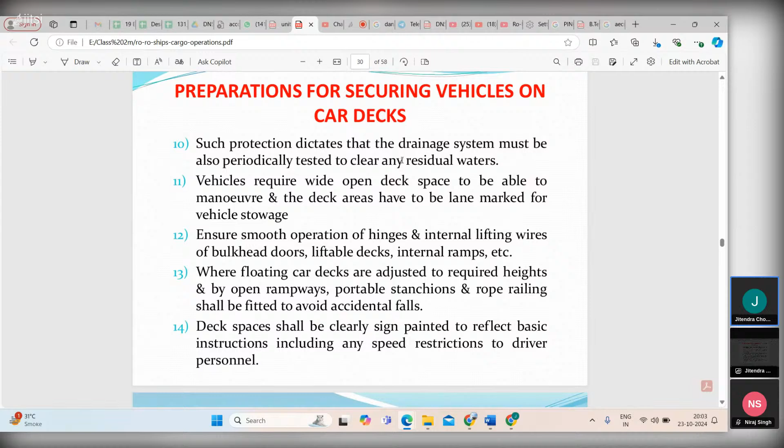We should also have a proper drainage system. If some water enters, due to sweat or whatever reasons, it should be able to drain. The drainage system should be periodically tested, and any residues, say stevedores came and ate something, should be cleaned. Proper cleanliness, hygiene and drainage have to be maintained. There are so many decks, so it's huge, hectic work.

Vehicles require wide open deck space to be able to maneuver. Deck areas have to be lane marked for vehicle stowage, so everything should be marked and enough space should be there for the cars and vehicles to come in and go, with proper lane marking. We will see that in the video now, and we have already seen how big the ramps and the storage space are. Sometimes because of commercial pressure we have very small space and so many cars coming in, going out, loading, discharging, so many ports, very fast operation.

With so many people and coordination, we have to ensure smooth operation of hinges and internal lifting wires of bulkhead doors, liftable decks, internal ramps, etc. Floating car decks are adjusted to required heights, and by open rampways, portable stanchions and rope railings shall be fitted to avoid accidental falls. So there should be railings or stanchions in all the rampways so that you don't fall. This also we'll see.

Deck spaces shall be clearly signed and painted to reflect basic instructions, including any speed restrictions for the driver, like you have on roads and highways. You can have a small look. See, this is so wide. That's why we have such big ramps, a proper opening. Sometimes you have them on both sides, one side for vehicles exiting and one side for vehicles entering.

Vehicles from international waters travel to your shores. Today, that curiosity will be answered. Imagine a ship, not just any ship, but one designed to transport thousands of vehicles across vast oceanic distances. This is the world of Ro-Ro, or roll-on, roll-off ships. These giants of the sea are not just marvels of engineering.

Not just marvels of engineering, but also the lifeblood of international trade. As we explore a Ro-Ro ship, we'll dive deep into the ship's daily life and operations, offering a first-hand glimpse of the sailors' challenges.

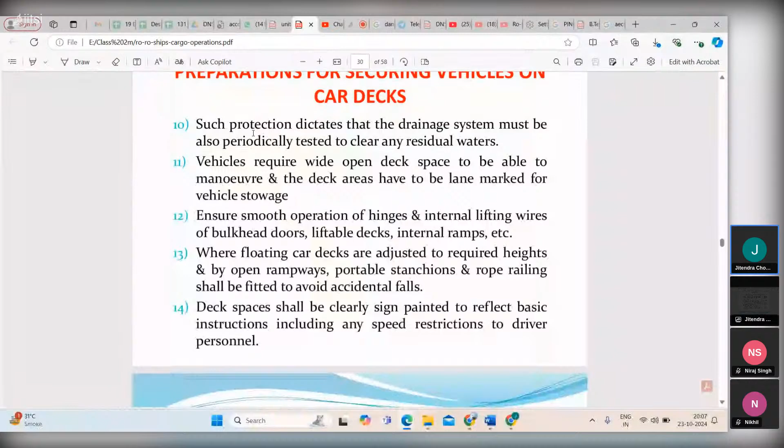Traffic cones shall be laid to indicate the safe driving route. These are the traffic cones which you saw. Then you see the ships. The first thing we saw was the traffic cones.

Maritime transport dates all the way back to 3500 BC. Marvels of engineering, but also the lifeblood of international trade.

As we explore a ro-ro ship, we'll dive deep into these ships' daily life and operations, offering a first-hand glimpse of the sailors' unique challenges, from the intricate dance of loading and unloading vehicles.

Other passages shall be blocked using highlight tape, and if a passage has to be blocked, you can block it with tapes. We will see that between two pillars you can put 2, 3 tapes and block it so nobody goes there by mistake.

Previously loaded cargo shall be marked by highlight tape or label to prevent inadvertent unlashing or discharge. For every cargo there should be some marking so that you can identify it is from this port or from that port, whether it has to be lashed, is it lashed now, or lashing has to be removed. So the clear marking should be there so that whoever is removing the lashing or doing the lashing is not confused. For every port there should be a proper different marking.

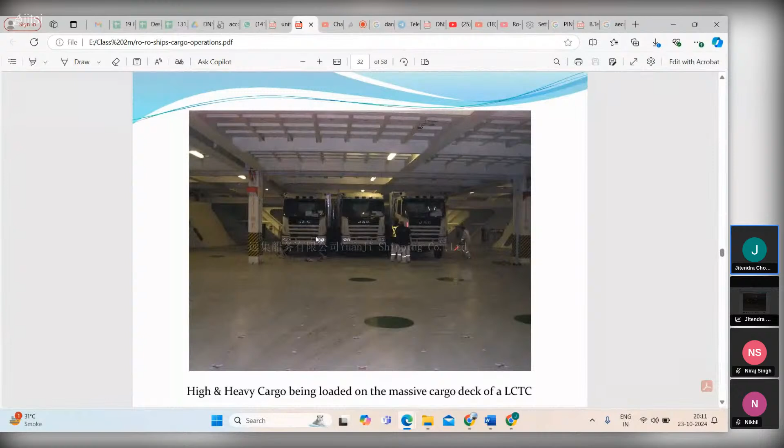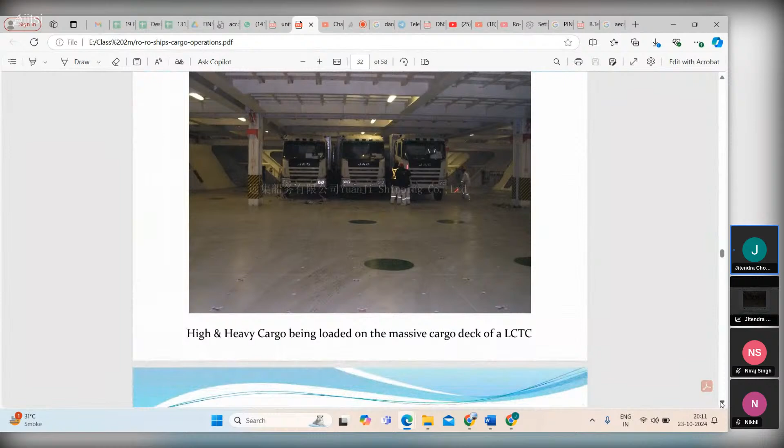Then a responsible officer shall check that the vehicles are adequately secured for the voyage. Securing is, as I told you, the most important and challenging thing here. But once it is secured, then it is somewhat safe. Anyway, the responsibility is on the shipper or receiver, because that's the way it is. High and heavy cargo being loaded on the massive cargo deck. Like for the ship, the carrier is not responsible. Same way on the shore.

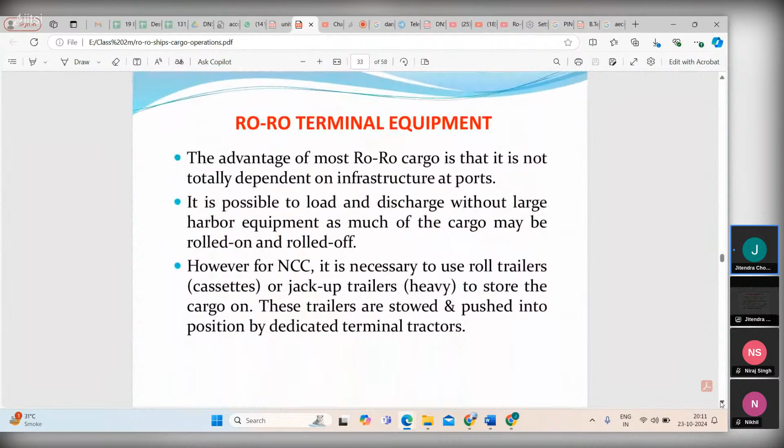The advantage of most ro-ro cargo ships is that they are not totally dependent on infrastructure at ports. It is possible to load and discharge without large harbor equipment, as much of the cargo may be rolled on and rolled off. However, for NCC, it is necessary to use roll trailers or jack-up trailers to store the cargo on. These trailers are stowed and pushed into position by dedicated terminal tractors.

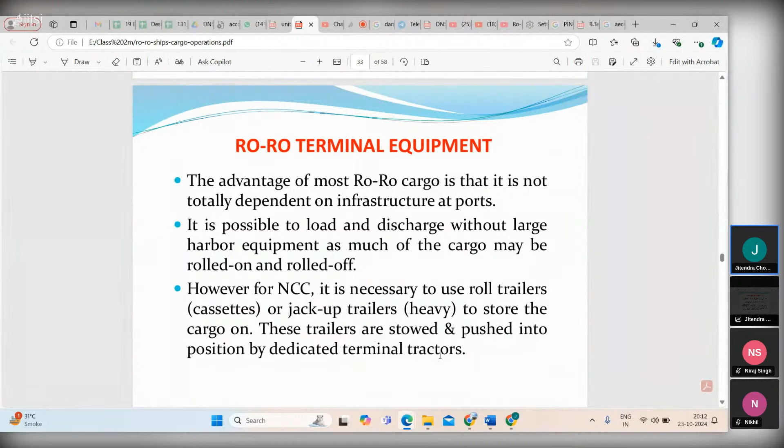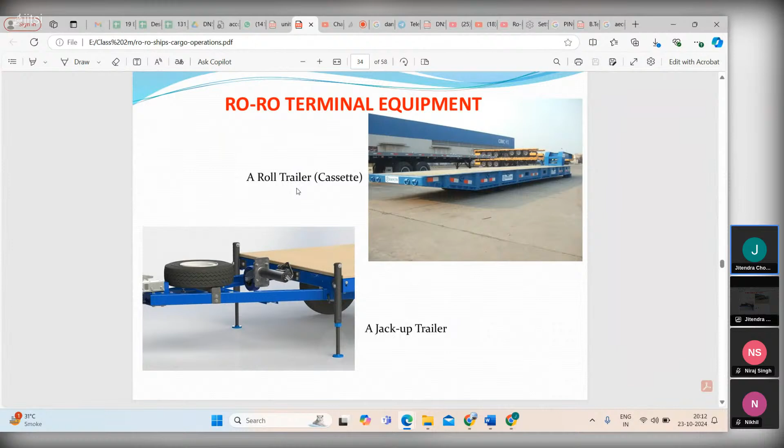So, what equipment will be used for the ro-ro cargo ship? You can see these. This is how they are stored, and then there will be some dunnaging or lashing like that. Jack-up trailer, roll trailer, ro-ro terminal equipment, a terminal tractor pulling a roll trailer.

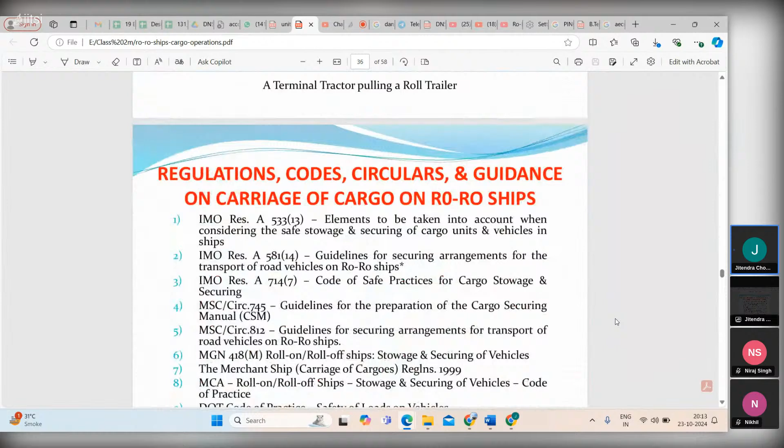Regulations, codes, circulars, and guidance on carriage of cargo on ro-ro ships. Elements to be taken into account when considering the safe stowage and securing of cargo units and vehicles in ships. Guidelines for securing arrangements for the transport of road vehicles on ro-ro ships. These are the reference books and regulations, load line publications.

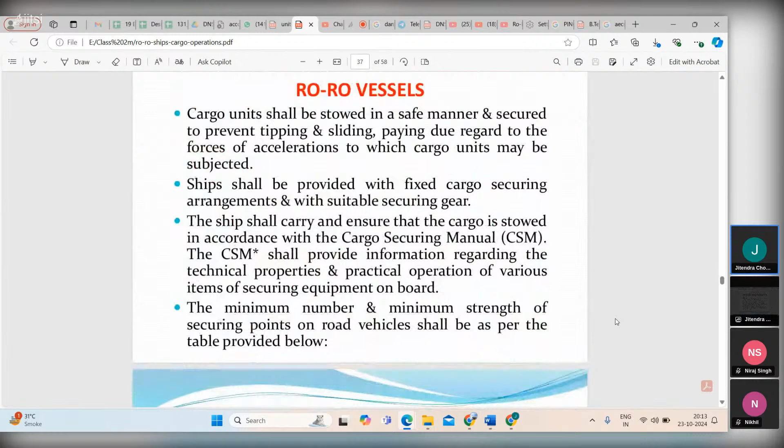Then, whatever cargo study is left. Cargo units shall be stowed in a safe manner. Whatever cargo we are getting, mostly container is quite easy. But whatever we are loading here, everything has to be properly stowed, segregated as per their codes, and then lashed and secured to prevent tipping and sliding, basically skidding of these vehicles, paying due regard to the forces of acceleration to which the cargo is subjected.

Ships shall be provided with fixed cargo securing arrangements and suitable securing gear. So sometimes fixed cargo securing gear is already attached to the decks or bulkhead, and you just take it out and lash the cars. That also can be done.

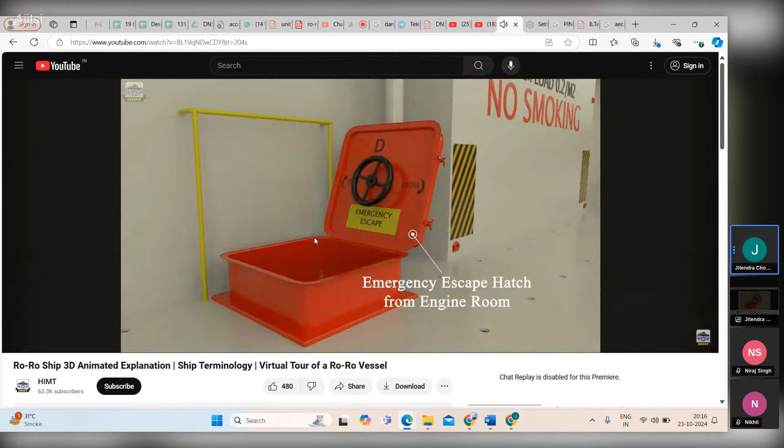So you see, these are so many lashing holes everywhere where we secure these belts, lashing belts. So you're getting a very good idea here, and when you start doing all the practicals, 360-degree and others, then you'll get a much better idea. That is safe, no smoking. No smoking. So all the marks should be there so that there is no spark.

And you see how these ramps are readjustable, extendable. And then you see on the ramp it is written what is the safe working load of the ramp. So you can see since vehicles are on other decks which are covered, the ventilation will be an issue. So these are ducts for doing ventilation.

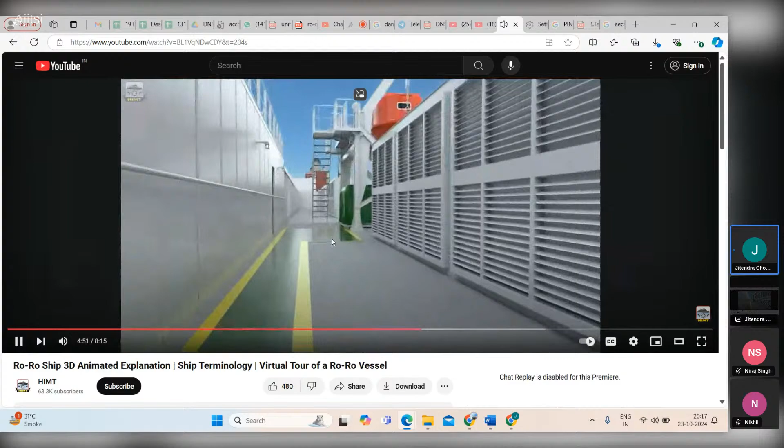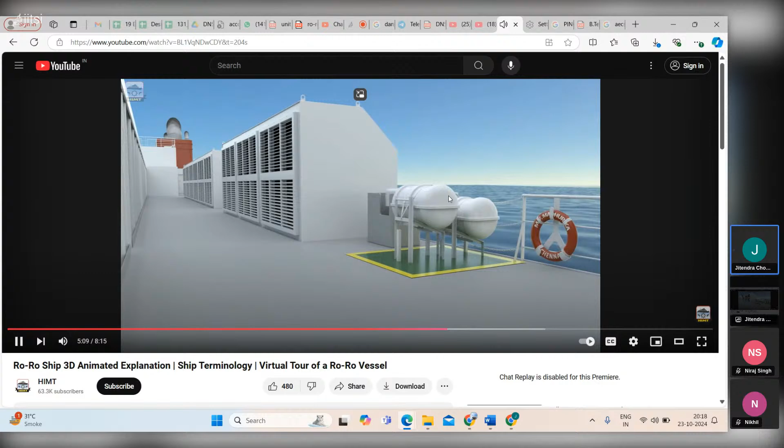Then these are normal ballast tank vents. This is number three. Then pathways marked with paint, yellow and green, normal embarkation ladder, etc. Life raft, life buoy. Stairway entry door. So, yeah, basically you have a way to go to the cargo space.

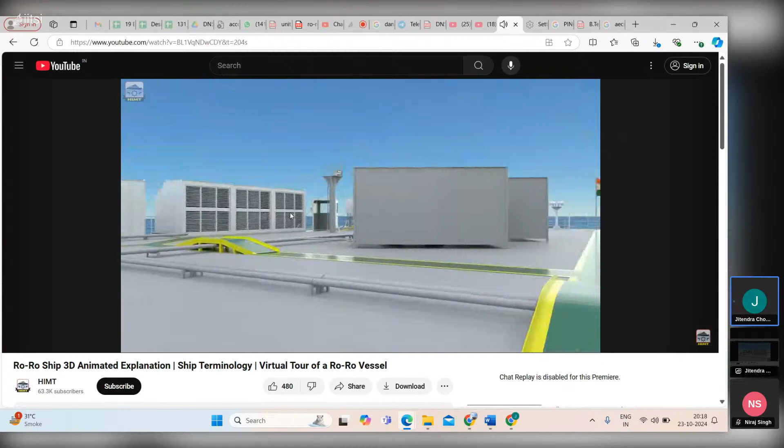Okay, so we'll continue this. The ship shall carry, and ensure that the cargo is stowed in accordance with, the cargo securing manual. The cargo securing manual shall provide information regarding the technical properties and practical operation of various items of securing equipment on board. So you can see it has to be properly lashed and secured as per this cargo securing manual.

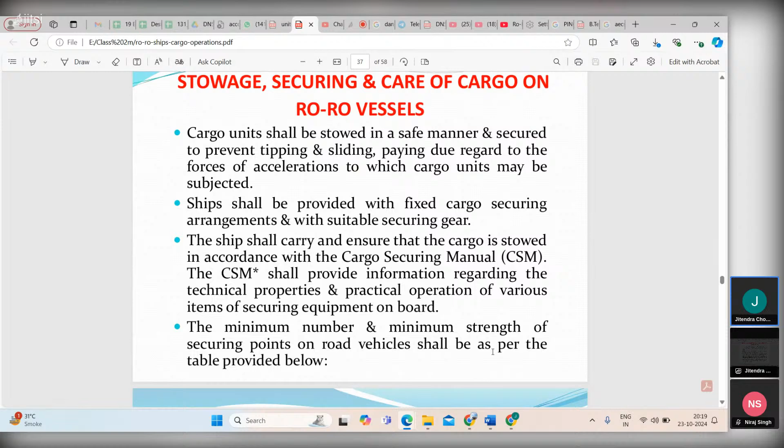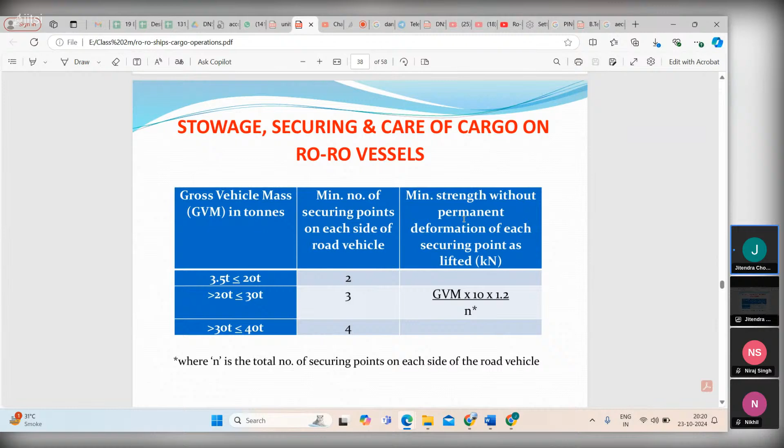So if you talk about stowage, securing, and care of cargo on ro-ro vessels, how do you put your car in your garage or in a truck to transport? Same way here, you put it on the ship. So obviously the main threat is your weather and rolling, pitching, all this. So you have to secure it properly. Each securing point should be marked in a clearly visible color. So there should be a separate mark, not the same as the hull color.

Securing points should be capable of transferring the forces from the lashing to the chassis of the vehicle and should not be fitted to axles and bumpers. So you have to make sure that the lashing is done properly from the chassis and the axle and bumper are safe. And then securing points on vehicles shall be so located as to ensure effective restraint of the vehicle by the lashings.

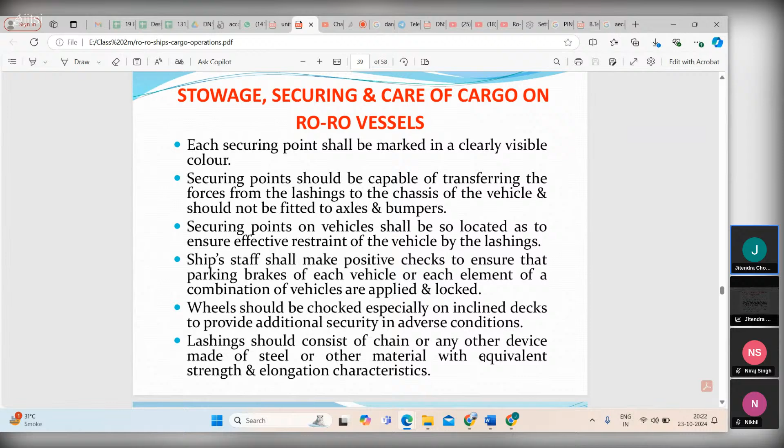Ship staff shall make positive checks to ensure that the parking brakes of each vehicle or each element of a combination of vehicles are applied and locked. Wheels should be chocked, especially on inclined decks, to provide additional security in adverse conditions. Lashing should consist of chain or any other device made of steel or other materials with equivalent strength. So you should have proper strength of the lashing.

Then stowage, securing and care of cargoes. So how do you secure? How do you stow them? This is called minimum securing load. So it should be marked on the equipment, and then you can know that it is tested up to much more than this. And mostly the lashing's strength is 100 kilonewtons.

Lashings shall be attached to a securing point with hooks or other devices and should only be attached to the securing points. So of course it should be properly lashed. There are securing points; I showed you so many securing points. You do the lashing in them because car carriers do a lot of securing. Then one lashing should be attached to any one aperture of the securing point on the vehicle.

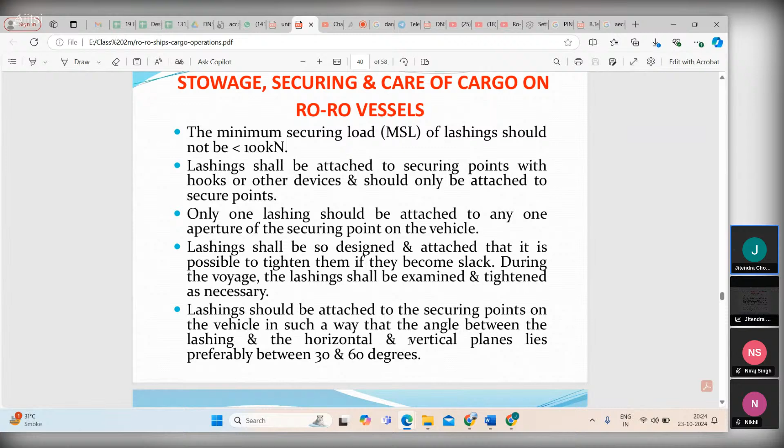Then the lashing shall be so designed and attached that it is possible to tighten them, and if they become slack during the voyage, the lashing shall be examined and tightened as necessary. The lashing should be attached to the securing points on the vehicle in such a way that the angle between the lashing and the horizontal and vertical planes lies preferably between 30 and 60 degrees.

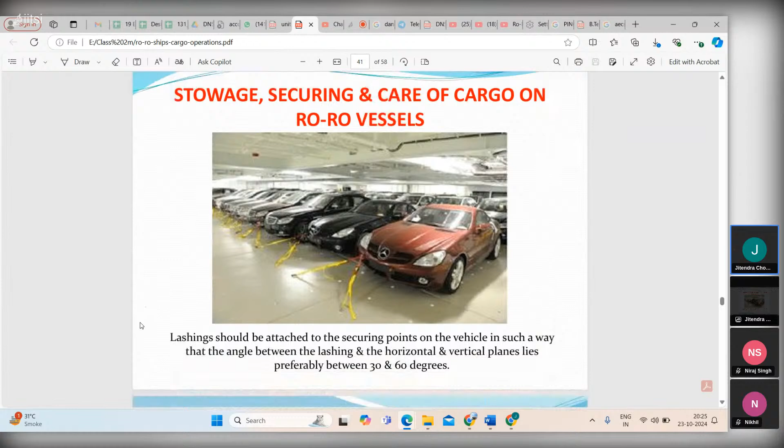So this angle for the... you see the lashing between 30, 45 or 60. So you can see two lashings front, two lashings out, and then the rest of the lashing depends. And the angle between the lashing is 30 to 60 degrees. Then quite good pictures. Stowage, securing and care.

What about the stowage? Where there is reason to suspect that the cargo within any unit is packed or stowed in an unsatisfactory way, or that the vehicle is in a bad state of repair, or where the unit itself cannot be safely stowed and secured on the ship and therefore may be a source of danger to the ship and crew, such unit or vehicle should not be accepted for shipment.

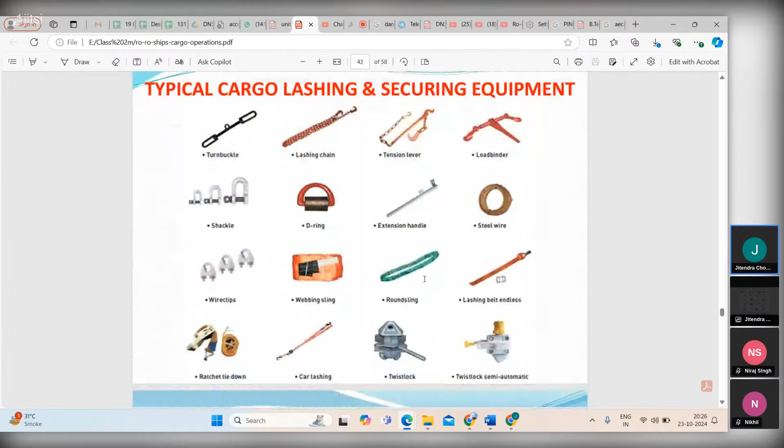So these are the different types of lashing: extension handle, steel wire, lashing belt, semi-automatic twist locks, webbing sling, wire clips, ratchets, tie down, extension handle, steel wire.

What makes Ro-Ro ships vulnerable? So, because it has very long hull and bulkheads. Unlike other vessels, Ro-Ro ships need undivided longitudinal space to roll on and roll off cargo. Obviously, they lack adequate subdivisions due to the absence of transverse bulkheads. So there are proper subdivisions in each hold, which are called

watertight doors, and very important, you can try to make a proper explanation. You have lack of bulkhead in the Ro-Ro ships. It's very high bulkhead, not properly dividing. Then lack of bulkhead also leads to rapid spreading of fires, as no subdivisions are present to contain the fire should one occur in the cargo space.

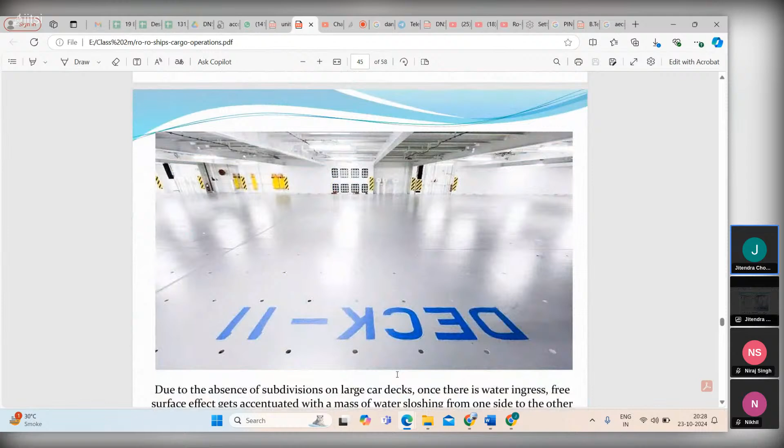So you should have the remedy for fires on. If it is small, you can just use an extinguisher, and otherwise you have to make sure you deal with it basically. What makes Ro-Ro ships vulnerable?

Yes. So proper cargo stowage and securing is very critical on a Ro-Ro ship. Any loose cargo, trailers, cars, etc., can give rise to a chain reaction leading to heavy shift in cargo position. Trucks and trailers loaded on board also carry cargo inside them.

Okay, so there are so many trucks and trailers which are loading on this, and they have so much cargo in itself. Many times crew try to take things, but mostly it is locked, depending on what items are there. So you have to make sure, and any shift of that cargo can result in listing of the ship, leading to probable hull damage and eventual grounding or even capsizing.

The shipments on a Ro-Ro vessel are normally scheduled where the majority of itineraries are predetermined and regulated by contract. So there are so many shipments, so many vehicles coming in, going out, so many itineraries, so many ports in and out. So it's quite hectic, but it has to be managed very properly. This may put added pressure on it.

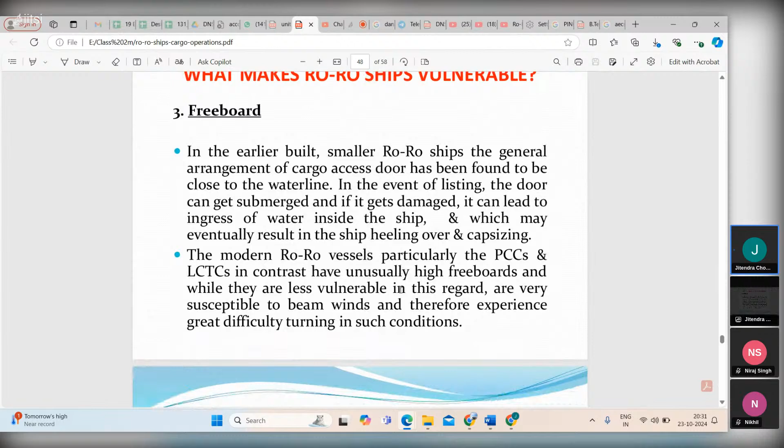The modern Ro-Ro vessels, particularly the PCCs and LCTCs, in contrast, have unusually high freeboards, and while they are less vulnerable in this regard, they are susceptible to beam winds and therefore experience great difficulty in turning in such conditions. So you see there are so many vehicles. They have a high front area.

So they are less vulnerable because, and susceptible to beam wind. So there are very high freeboards and then there are a lot of beam winds. So it's very difficult to control the vessel, especially in high rolling and all.

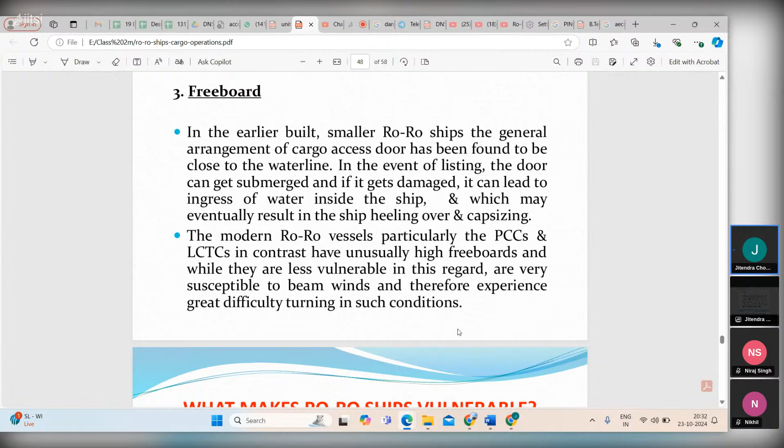So as they said, it has to have rolling for this, what do you call it? PCCs, pure car carriers, and LCTCs. So the high freeboards, whatever their cars have to be properly lashed and checked. So just this is the last what we're going to do today.

What makes a Ro-Ro vulnerable? So vulnerable means what situations can harm or damage something in the Ro-Ro. So whatever is there in the port, you have to mark the cones, proper entry and exit of the terminal. And then one weak point of a Ro-Ro vessel is that sometimes the cargo door itself is used as a ramp, which makes the ship even more vulnerable to damages.

So if you are using the cargo door as a ramp, that means you don't have any money and there are a lot of cheap things going on, not standard. So that will cause you harm in the long term. Let's see this.

To the dedicated crew that ensures that each voyage is a success. Join us as we navigate the fascinating world of Ro-Ro shipping. Evolution and diversity of Ro-Ro transport ships. The first means of maritime transport dates all the way back to 3500 BC. Since then, the maritime landscape has witnessed numerous innovations, few of which have transformed it the way a Ro-Ro transport ship has. Tracing its origins back to the 1960s, the inception of Ro-Ro transport was a response to the rising demand for efficient motor vehicle transfer.

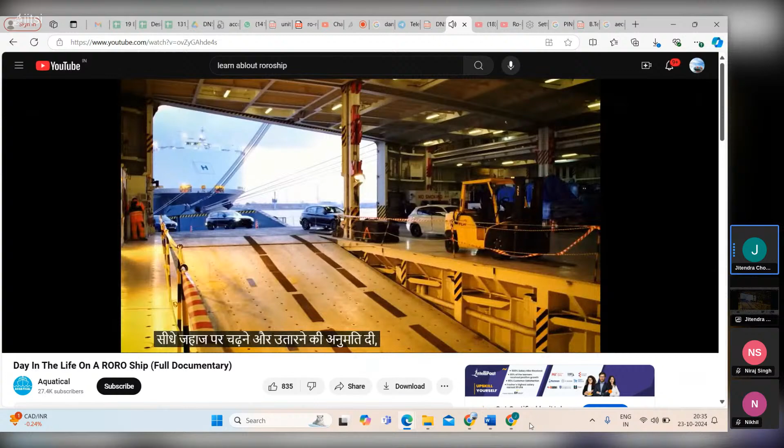Traditional methods, which relied on cranes for loading and unloading vehicles, were becoming increasingly unreliable. They were not only time-consuming and costly, but also fraught with safety concerns. Enter the Ro-Ro vessel, a game-changer in the truest sense. These ships, with their expansive doors, vast deck areas, and specially designed floating bridges, allowed vehicles to be driven directly onto and off of the vessel. This innovation streamlined the entire transportation process, offering a solution that was faster, more economical, and significantly safer.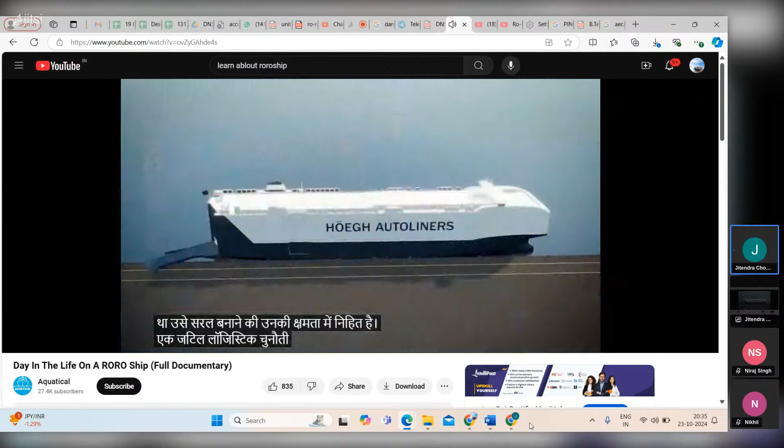The primary advantage of Ro-Ro ships lies in their ability to simplify what was once a complex logistical challenge. But the world of Ro-Ro ships is as diverse as it is innovative. These vessels are not all the same. They are tailored to cater to many different transportation needs. For instance, there are the large car and truck carriers, LCTC, designed primarily for transporting a wide range of vehicles. These ships can accommodate everything from compact cars to towering trucks, ensuring they reach their destinations safely and efficiently. There are also other variations, like the Conro.

So Conro, container and Ro-Ro vehicles. Like inside you have Ro-Ro vehicles and on the deck you have containers. So different ships, different types of ships as per the cargo construction. A lot of ships are made, but we will follow. But the class will help decide whether it is followed and how much it is followed, all the plans, requirements, etc.

A hybrid that combines features of a container ship and a Ro-Ro ship. The lower decks of a Conro are reserved for vehicles, while the upper decks are designed for stacking containers. In addition, there are Ro-Ro ships specifically equipped to handle heavy equipment and break bulk cargo. These giants are even more impressive, boasting ramps with enormous weight capacities and spacious decks designed to accommodate equipment of significant height and width. They are vessels of choice for transporting heavy-duty items like construction materials, mining machinery, and agricultural equipment.

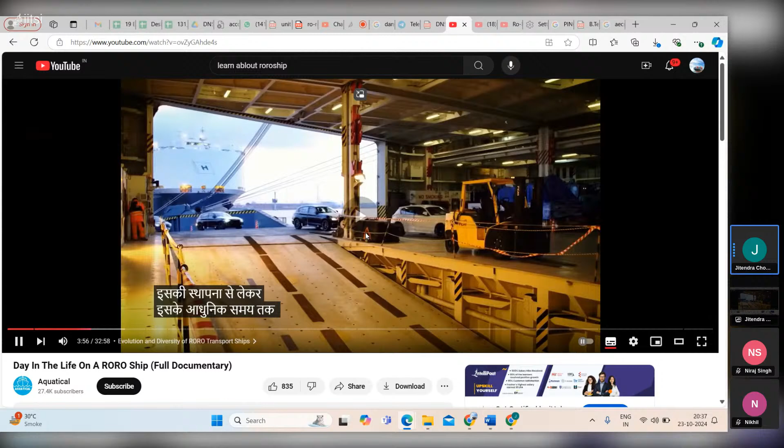Ro-Ro ships have continually adapted, reflecting the ever-changing demands of global trade and transportation.